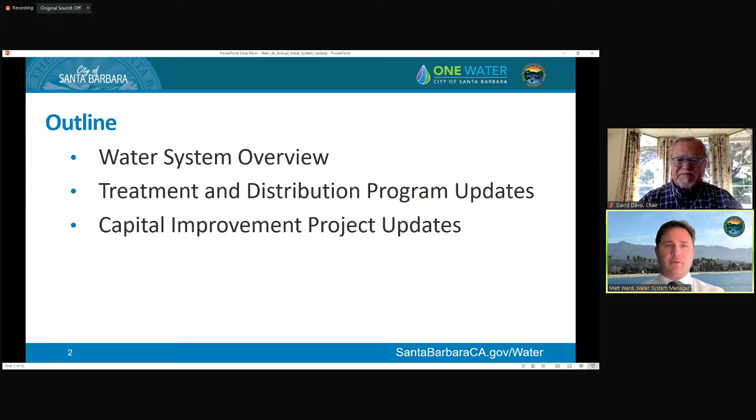It's important to mention that we have a diverse supply of water sources, which shapes our water system. In fact, we are a T5, D5 water system, the highest rated in the state. You're familiar with our different sources: state water, Santa Ynez water, groundwater, desalination, and recycled water, which we'll touch on briefly, but today we'll really focus on our potable water system.

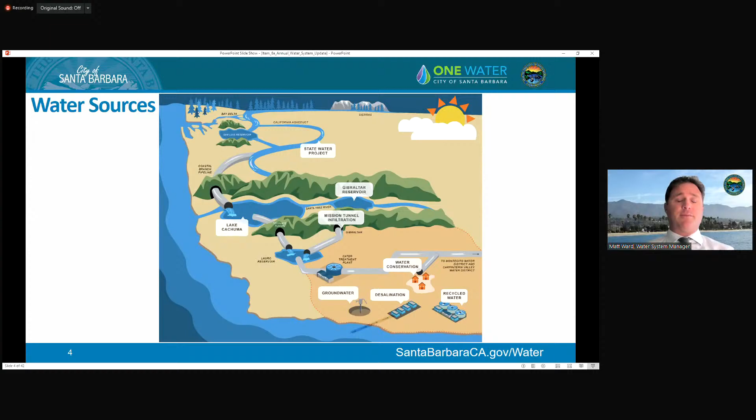What you see here is the 10,000 foot elevation of the city's water system. It's comprised of 3 potable water treatment facilities connected through 300 miles of potable water transmission mains and water mains, along with 13 reservoirs, 14 pump stations, and over 27,000 service connections. With that, I'll turn it over to Andrew Rhodes, our water treatment superintendent.

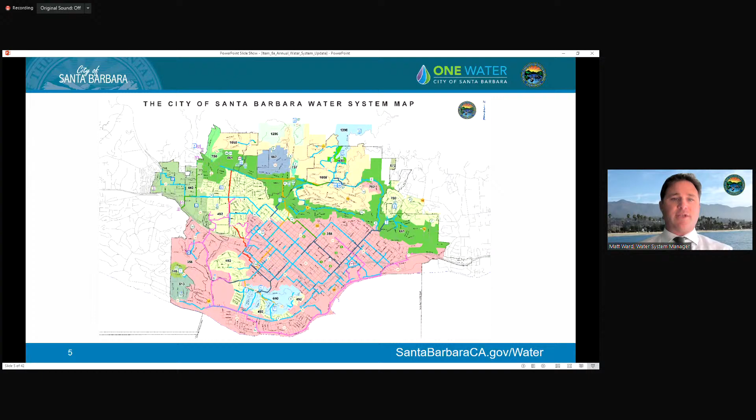Good morning, Chair Davis, Water Commission. My name is Andrew Rhodes, Water Treatment Superintendent, and I'll be providing a brief update on some of the programs under the water treatment section for fiscal year 21.

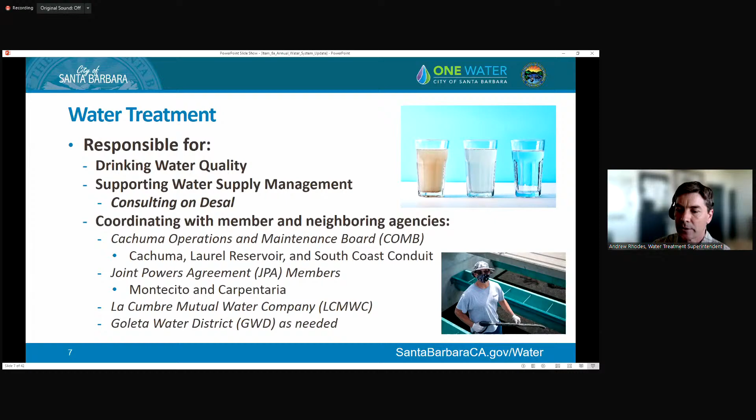We also coordinate with La Cumbre Mutual Water Company and Goleta Water District regarding water quality, supply, and project planning. The picture on the bottom right shows Winter Martinez performing biannual filter maintenance and inspection of filter media for life cycle analysis.

Ortega Groundwater Treatment Plant supplements surface supplies during times of drought or emergency. There are 4 downtown wells, Veracruz, City Hall, Corporation Yard, and High School that currently supply the plant. We have an upcoming project to connect a 5th well, Alameda Park, to the facility for treatment prior to delivery

into the distribution system. We are also responsible for the operation and maintenance of the hydroelectric plant, where when there's water in Gibraltar, diversions are conveyed through Mission Tunnel to the hydroelectric plant located on the north side of Laurel Reservoir. Electricity produced from the facility can completely offset all of Cater's electrical demands on a good year, which I would define as a year when Gibraltar spills.

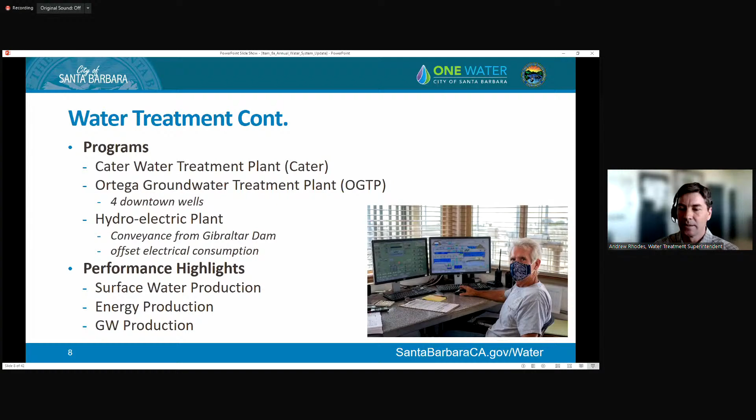So as mentioned before, Montecito and Carpinteria Valley Water Districts participate in both operational and capital project costs for Cater, which are defined by a joint powers agreement that was established in 1978 and followed by expanding Cater's capacity by adding 5 additional filters and constructing the South Coast Conduit Booster Pump Station to convey the treated water.

Our JPA members cover roughly 40% of the operation and maintenance budget, as well as the capital budget for projects at Cater. This slide shows a 10-year chart highlighting the percent of Cater's annual overall production that supplied Santa Barbara customers in blue versus Montecito and Carpinteria in green.

You can clearly see on the chart when water conservation measures took effect with the last drought, with a greater than 25% reduction in total plant production, and the slight rebound that we experienced starting in fiscal year 18.

This chart is somewhat skewed in that the past 3 years or so, the desal plant has consistently contributed water to help meet the city's demand, which would have otherwise been supplied by Cater. And so those blue bars, at least for 18 through 20, would be slightly higher without desal.

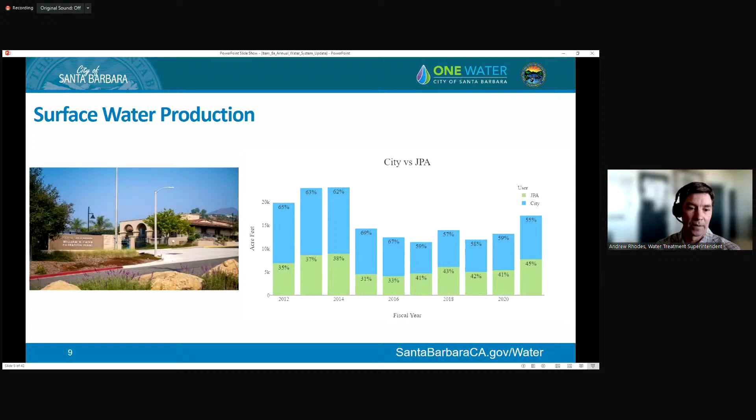Last winter was significantly below average for rainfall, and Gibraltar did not see any runoff. So by January 2021, it was empty. This winter has been better so far. It's filled to just over 50% capacity. So hopefully a few more storms will come and we'll fill it completely.

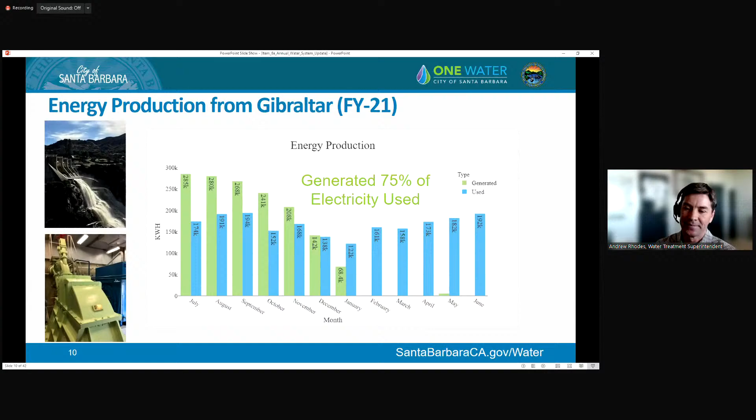There was no groundwater production in FY21. We have been resting our groundwater basins for the past several years, allowing for continued recovery after heavy pumping during the last drought. We took advantage of this resting period to clean and rehabilitate Corporation Yard Well in 2020.

The current plan is to start up Ortega groundwater treatment plant this coming August to help supplement supply. This is subject to change depending on how much additional rain we receive this winter and how much recovery our surface water supplies experience. I would expect, however, that if Lake Cachuma doesn't see significant inflow and rise in storage, that we'll be starting up the plant this coming summer.

And so with that, I'd like to open it up for any questions before turning it over to the next presenter. Any questions from any of the commission at this point?

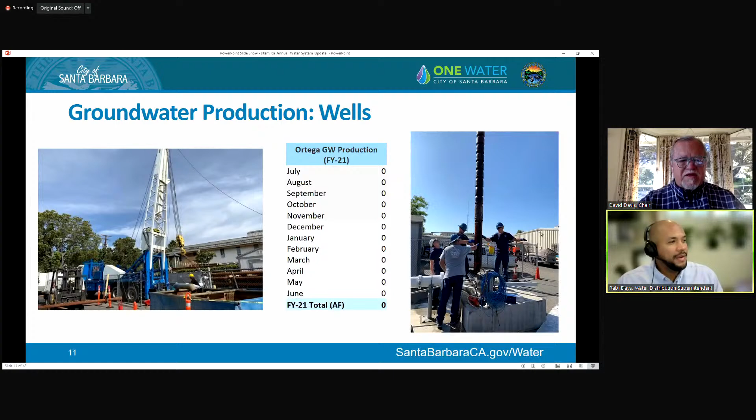Thank you, Andrew. Good morning, commissioners. My name is Rabi Days, I'm the recently appointed Water Distribution Superintendent. Today I'll be giving you an overview of the Water Distribution Work Group, as well as some of our recent performance highlights.

Water Distribution is a fairly large group with 34 full-time staff members supported by 3 supervisors with their own work groups. Here we have a list of some of our general responsibilities, our most obvious responsibility being the maintenance and repair of the potable and recycled water distribution systems.

We've also been responsible for the metering program and customer service, but our recent reorg has now transferred the metering program to the Water Services Work Group while maintaining a shared responsibility for customer service. We oversee the storage and quality control of our water supply once it leaves Cater treatment plant.

Lastly, for this slide, I believe an understated but important part of what we do is our level of coordination with other agencies and work groups, public and private. Here we have listed some of the groups we work with, from the City Public Works Permits Counter to the Land Development Team, especially with the uptick in increased density development the city has seen in recent years. Our staff helps scope and process water-related construction permits, but also actually builds the underground infrastructure to support these projects.

We also coordinate with a lot of other city work groups on asset conflict and considerations for city capital projects. We work with transportation, streets, wastewater, parks, water engineering for our own capital projects, and even creeks. Our most recent project being the Arroyo Burro pedestrian bridge, a creeks improvement initiative that involved relocating our water main that was previously running across the creek, incorporating that relocation into the design of the new pedestrian bridge. This coordination gave us the opportunity to raise our water main above the 100-year flood line while adding protection in the form of the bridge structure itself.

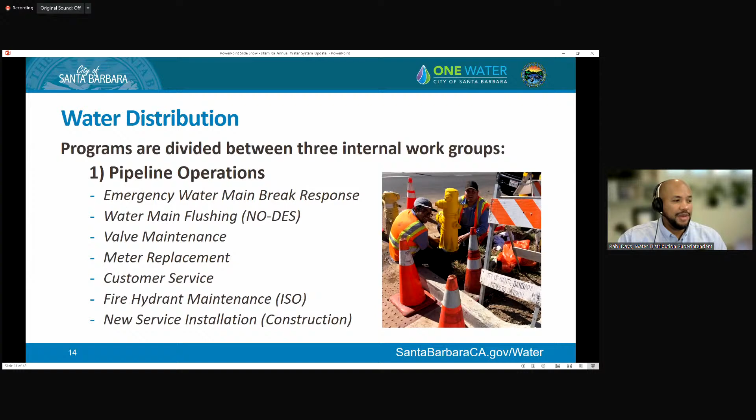This crew is also responsible for valve maintenance, meter replacement, customer service, fire hydrant maintenance as pictured in the photo, and new service installations.

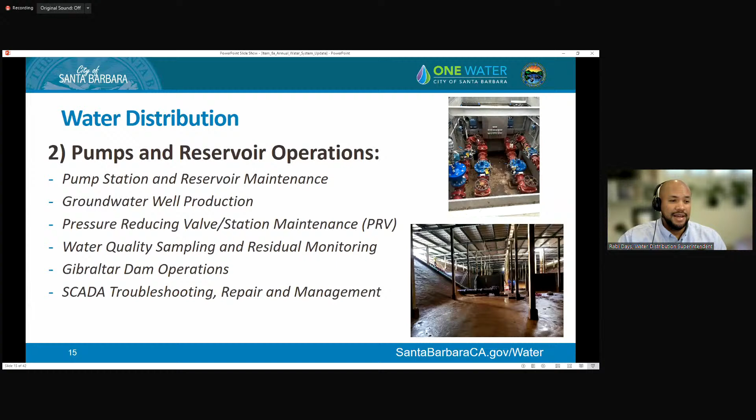There are also 2 subgroups that branch off from this group, one being the full-time on-site Gibraltar Dam caretaker and the operator that assists him with maintenance of our dam facilities, and the CSOS or Control Systems Operator Group that maintains, troubleshoots, and manages our SCADA system, allowing us to remotely monitor and control certain aspects of the water system.

This group manages our asset management software, specifically our planner scheduler, who works closely with staff to document our work and oversee the preventative maintenance methods. Our coordinators are under this group as well, handling our utility coordination and plan review. Also our cross-connection team looking out for the safety of our drinking water and enforcing standards and regulations for the distribution group as a whole.

Recycled water user agreements and customer interactions are also facilitated with this group. So this group really has a broad range of skills and duties. But I think the program that I'm most excited about with this group is our developing GPS program. A couple of years ago, we started collecting high precision GPS data for our assets.

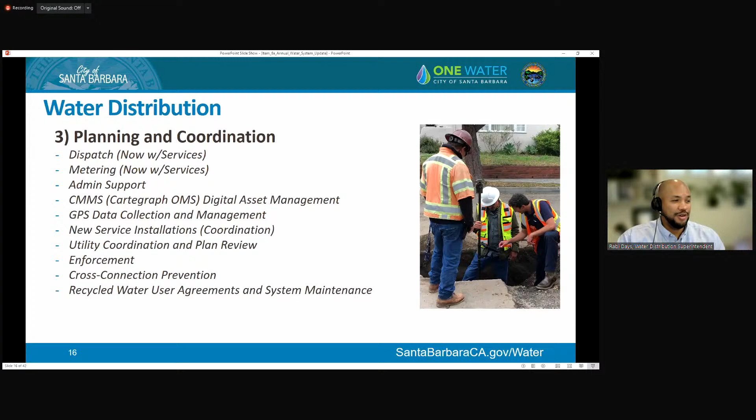But for this year's performance highlights, we've got 4 programs that I'll be discussing: our emergency water main repair, our valve maintenance, our customer service, and our fire hydrant inspection and maintenance program.

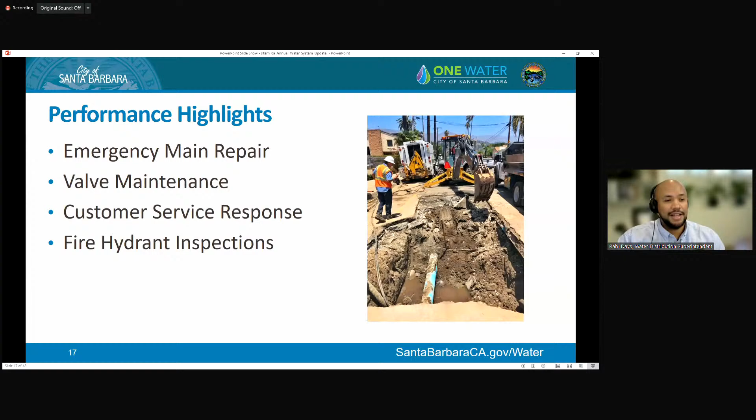In this slide, we have a photo of a water main repair. On the backhoe, we have Alfonso Lopez, one of our more experienced technicians.

Compared to all the types of work that we do, water main repair is definitely the most visible and impactful for the community in various ways. It's messy. We usually have to reroute traffic. It's loud, and the water service is often disrupted. Our response in this area can greatly affect the public perception of our entire work group and the city as a whole.

Some main breaks can be addressed without shutting down the water main, with our only community impact being traffic rerouting and construction noise. But other mains can be difficult to access for reasons such as being encased in a bridge or freeway crossing or on a remote easement that would require a non-standard repair.

Others may require a shutdown of water service to that block, or in some cases, multiple city blocks. And when we've determined that a shutdown is needed, we also have to look at who it affects. We have medical facilities, schools, restaurants that are all significantly impacted by a disruption in water service. So we weigh those community needs against the severity of potential risk for damage or loss. And that's really going to be a different scenario for every main break that we come across.

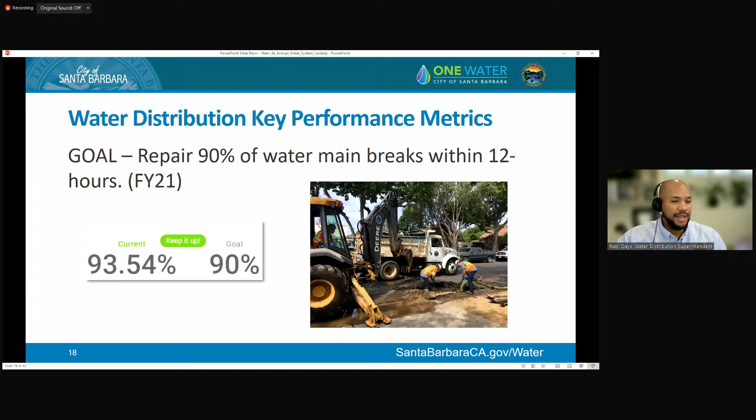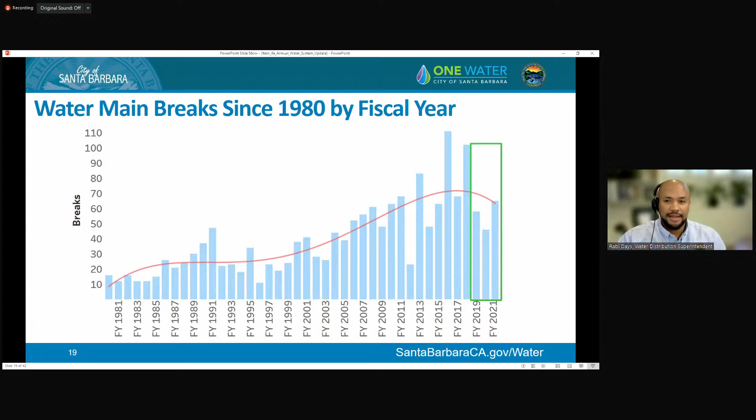One of the efforts adopted to combat this problem was the increase to our main replacement mileage to 2% after FY18. As you can see, FY19 through FY21, the increased scope appears to have contributed to a downward trend in our main break numbers. We're seeing the same trend this year, with our current tally being at 35 main breaks for fiscal year 22. But refinement of our approach is an ongoing task, and we aim to drive that number down as much as we possibly can.

So next slide, please.

The next performance metric that I'll be discussing is our valve maintenance target of exercising 4,500 valves every year, which is roughly half of our system isolation valves. Our valve maintenance program involves targeting the valves in our system on a preventative maintenance schedule and operating them to either confirm or restore functionality and flag any valves that are not functioning properly and need to be replaced.

This is important because our isolation valves are the sole mechanism used for shutting down water mains during emergencies. So faulty valves equals a prolonged inability to shut off water, which in turn equals increased potential for damage, increased water loss, and an increase to the number of customers affected by emergency-related outages.

But bad valves can also negatively affect planned work. It often increases the scope and notification needs for planned projects, often extending construction schedules, which can have budgetary consequences and lead to bad community relations.

And valves that are completely broken, closed, and unaddressed may not be a visible threat, but can create water quality issues in the form of unintended dead ends and not allowing for the grid circulation that our system is designed to do. As you can see in the graph, we were close to reaching our target this past fiscal year, but have struggled in past years.

This is an AWWA recommended maintenance practice, so we did make some adjustments to help get us closer to our target. And we're continuing to improve our strategy.

Some of the adjustments that we've made are adding additional staff so that we have more resources to spread across the entirety of our annual objectives. We also purchased an additional vehicle with a valve actuator so that we could deploy 2 crews at a time in case one was tied up with capital project support.

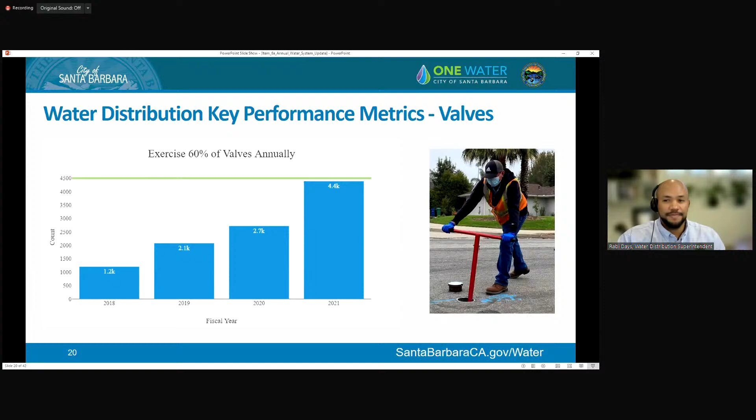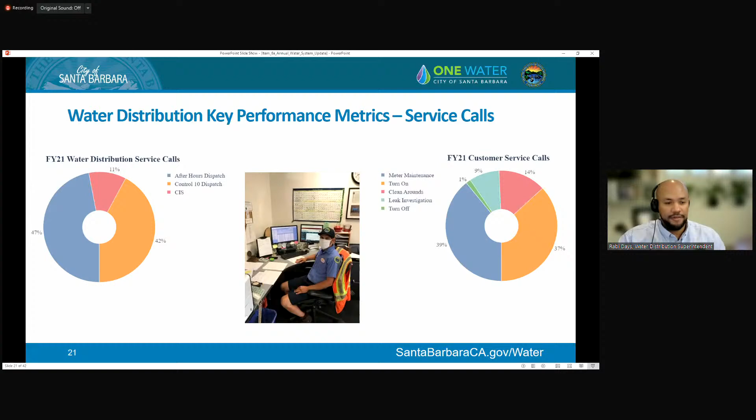I think across all of our programs, the pandemic has really put our community impact into perspective for all of us. Next slide, please.

That does it for water distribution, so I'll open it up for questions before passing along. Any thoughts or concerns?

Thank you for the presentation. Are there any questions or comments from commission members at this point?

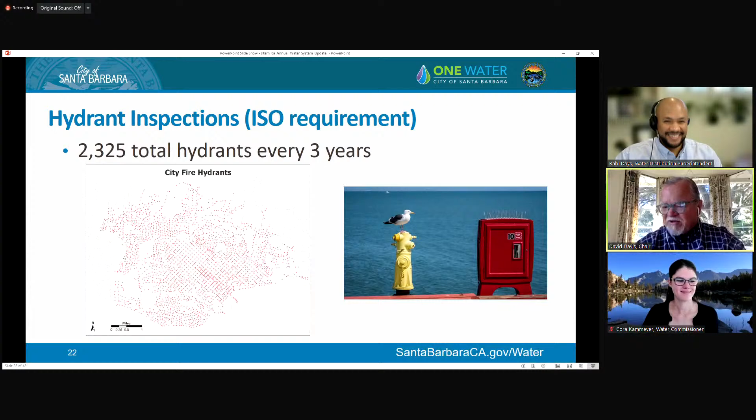A lot of work, just a compliment on the amount of work you guys do. Again, on all these divisions, it's 24/7, 365. It's amazing because you're out of sight, out of mind for most people, but incredible work that you folks do. So thank you for that.

Appreciate it. Okay, want to continue with the presentation, or where are we at right now? Yeah, thank you for your time, commissioners. I'll be passing along to Principal Engineer Philip Maldonado. Great, next slide please.

Perfect, thank you very much, Mr. Days. Good morning, commission members. My name is Philip Maldonado. I am the interim principal engineer with our Water Resources Engineering Group, and I'm here to provide updates on the capital projects being implemented for the water system. I will review these projects by the different project areas within the water system.

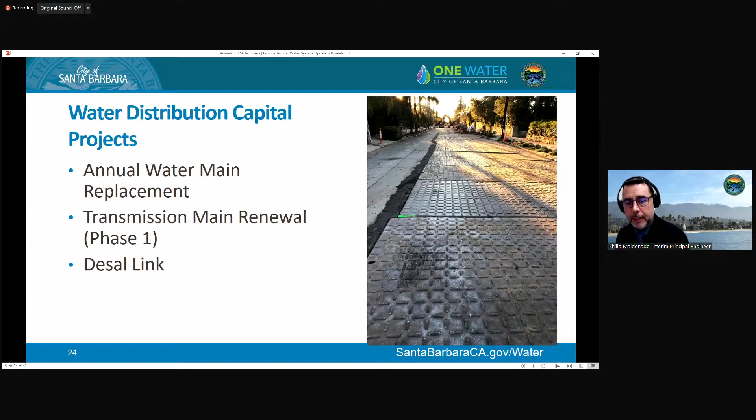We have worked to prioritize replacement based on factors which include, but are not limited to, material type, break history, size, installation date, and location. We have also remained adaptable to changing priorities. A primary example is the reduction of this project in fiscal year 2020 due to the COVID emergency.

The current project in construction began this past November, with the second phase scheduled to begin construction this coming summer. The next fiscal year project is actually scheduled to begin winter of 2022-2023.

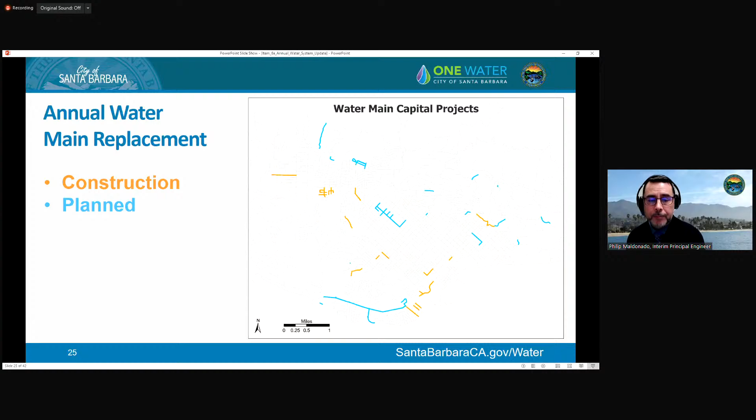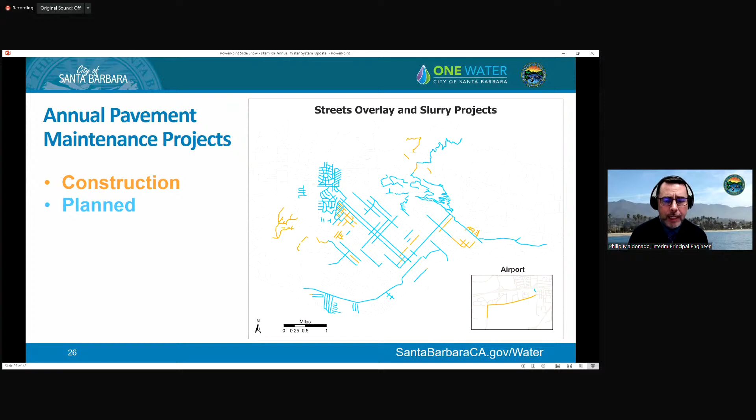The diagram on this slide depicts the planned pavement maintenance for the next few years. Coordinating with our streets division is a key objective to the water main process improvements that have recently been implemented. The extent of both the water main replacement and pavement maintenance projects highlights the need to stay coordinated for effective project implementation and to minimize disruptions for the public.

I would like to take a moment to share the effort that we undertook to improve and document our water main replacement process. We realized there would be serious process impacts induced by doubling the size of the water main replacement project. We set a goal to implement this change while minimizing cost impacts and improving delivery schedules, while also modernizing planning.

For accuracy and efficiency, we focused on mapping and defining the process, improving coordination between all stakeholders, clarifying roles and responsibilities, improving the transfer of information, and ultimately building a culture defined by one water, one city. The diagram on this slide is the basic outline of the process workflow our team designed. Each of these areas was identified as integral to realizing the goals we have set.

We use a cycle to reinforce the need for communicating feedback and refreshing data streams. Mapping this process helped to identify multiple updates. These include using a multi-year contract for design services, adding pre-design team site walks, improving asset management and geodatabase workflows, defining roles and responsibilities, and outlining pathways for communication and coordination, just to name a few.

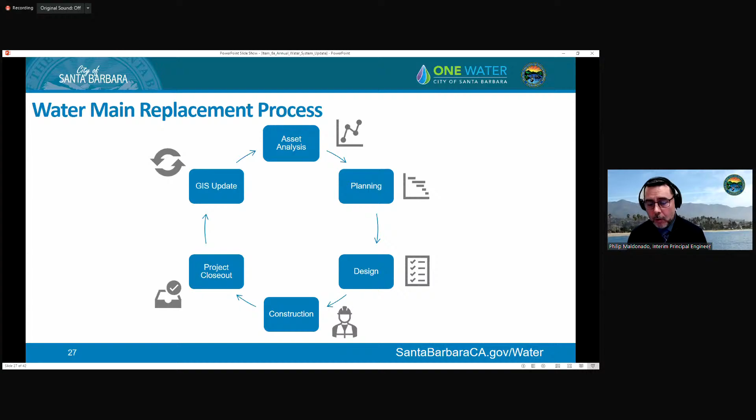We have already started to see implementation benefits. These include improved resource allocation with sequenced capital improvement work between the groups, fewer disruptions to neighborhoods, reduced pavement disruptions, and more areas for cost sharing.

The next project I'd like to discuss is the transmission main renewal. As depicted on this slide, phase 1 of the transmission main renewal will focus on rehabilitating the existing distribution transmission main between the intersection of Mission and Garden Streets and the Cater Water Treatment Plant. The transmission main pipeline was assessed to be in good condition, allowing us to gain the benefit of using existing infrastructure for much of the distance between the desalination plant and Cater.

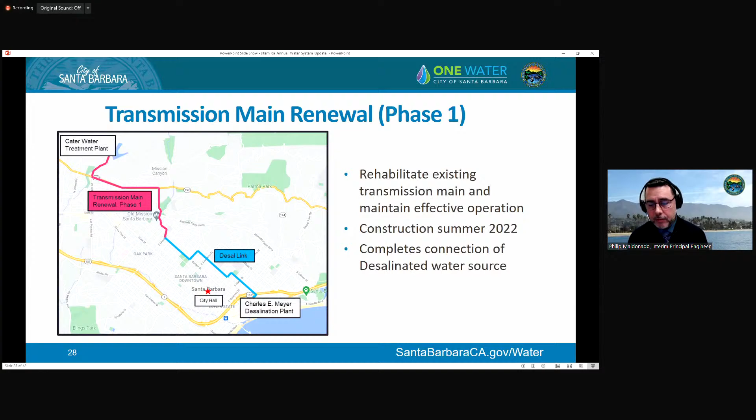Rather than replacing this length of pipeline, we are ensuring a high-quality transmission system by strengthening the existing segment and connecting it to the new desal link. The work for this project will replace valves and associated operational equipment along the length of the main, in effect renewing the system. Construction is currently scheduled for later this summer.

Construction began this past November, starting at the intersections of Mission and Garden Streets. Installation work continues to progress south to the desalination plant. Work has experienced some initial challenges due to large boulders and unforeseen conditions.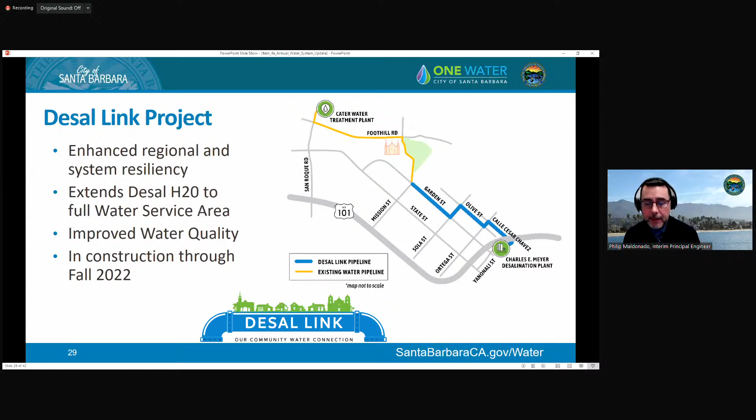But as with all of our capital projects, we are working diligently to ensure our existing infrastructure is restored and maintained as this new pipeline is installed, to guarantee all of our assets support ongoing public benefit for years to come. Work continues to move south, and we anticipate the pace of installation to continue on a reasonable schedule.

This brings us to the recycled water capital projects. The project focus here is the recycled water distribution pump upgrades. This pump station is the heart of the recycled system. It was constructed in the early 1990s and supplies all of the water for the recycled system. The goal of this project is to replace the mechanical and electrical equipment in the pump station.

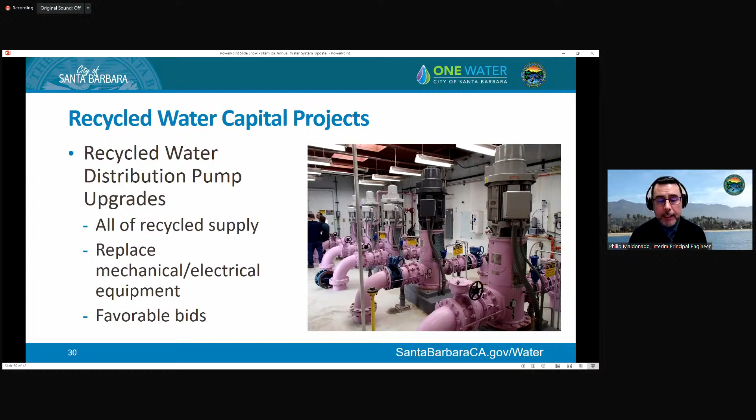The city received favorable bids to construct this work, and the project is currently in construction and is scheduled to be complete summer of this year.

We will now review the water treatment capital projects. Our focus is on the Cater Finished Water Reservoir Resiliency Project. The goal of this project is to add a chlorine contact time reservoir to the Cater Water Treatment Plant.

The design includes a structural analysis of the existing clear well. The design will also include reconfigured inlet and outlet piping to the clear well.

Design for this project began in June of 2021, and the project has established a conceptual design, and this concept design is being analyzed for environmental review and water flow and treatment characteristics. The concept will be defined in the preliminary design report that will be delivered this winter. Design is scheduled to continue through winter of 2023, and the total estimated project cost is anticipated to approach approximately $20 million. Next slide, please.

We will now review the reservoir capital projects. Our focus for the reservoirs is the Vic Trace Reservoir Replacement Project. The Vic Trace is the city's largest distribution reservoir. It is a critical storage buffer for operational needs.

It is worth mentioning that the start of this project must be coordinated with the completion of the Cater Finished Water Reservoir project. The full storage capacity of Cater must be available when this storage is removed for construction.

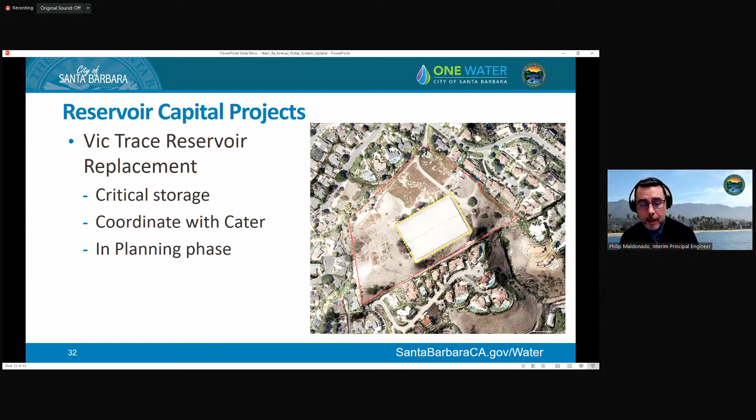The design contract is scheduled for next fiscal year. This project was identified through the water distribution infrastructure planning effort, and the total estimated project cost at this point is just over $40 million. Next slide, please.

Finally, we'll discuss desalination-related capital projects. For desal, we focus on the product water pump station upgrades. The product water pump station upgrades are needed to help move water up to the Cater water treatment plant from our desalination plant. Water can be distributed to all portions of our system once water is moved to Cater.

The project is nearing 100% design and is scheduled to begin construction in summer of this year. And with that, that concludes my portion of the presentation. So I leave it open to any questions if there are.

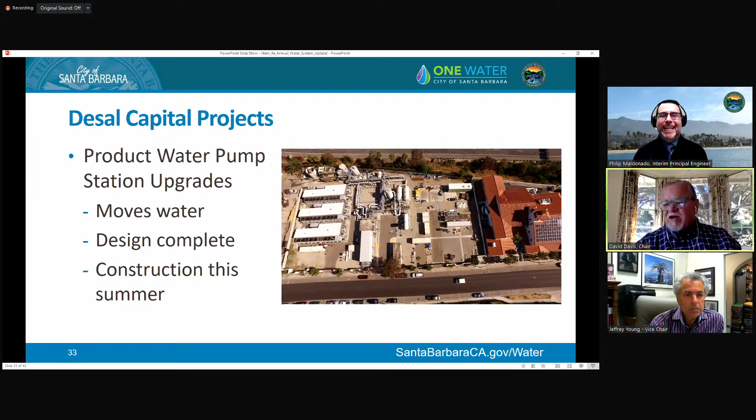Okay, I'm going to look for any questions. I actually have a question relative to process for Mr. Haggmark and Ms. Becerra. We've moved over from GoToMeeting to Zoom, and I've been looking for people to raise their hand. I noticed that Commissioner Kemmerer had a question in the previous section, and she turned her camera on, but I wasn't looking for that. I was looking for the Zoom raise hand or something else. So we'll come back to talk about what our procedure is. Right now, I'm going to be looking for raised hands. If you go down to your taskbar at the bottom, there's a raise hand thing.

So is anyone who wishes to raise their hand on this item? And I'll actually come back to you, Cora, basically for your other question. Any questions? Go ahead, Jeff. Thank you. And so I'm just curious, the cost for the desal capital projects, I don't think I heard a number.

With the desal capital, the product water pump station upgrades project, right now our current estimate is around $3.5 million. And actually, Mr. Ward or Mr. Haggmark, please correct me if I'm misstating that. So, I mean, that's close enough. I'm just looking for kind of an estimate.

So I heard 40 million for one upgrade and 20 million for another. It's a lot of money to me, to my ears. I just want to hear from you guys how this is expected, it's anticipated, it's all within our budgeting, and there's no red alerts here.

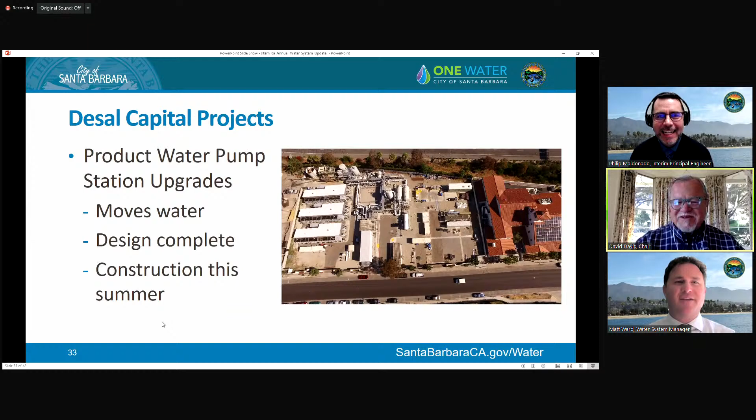Okay, other questions at this point for Mr. Maldonado? Philip, I guess I don't see any. Thank you. Thank you, Chair Davis. At this point, I'll turn it back over to Mr. Ward to close out the presentation. Thank you.

Thank you, Mr. Maldonado. So we just wanted to touch briefly on some of our other water system program highlights. We do have some developing programs, and wanted to get this in front of the commission, and in future years we'll be adding to this presentation, or perhaps have an entirely separate presentation on our water service, our customer service group. This is a new work group formed of existing employees in areas that focus a lot on customer service, as well as some new leadership in the customer service work group. They're currently very focused on AMI, which I'm going to touch on briefly, and we also wanted to connect on our desal contract operations briefly.

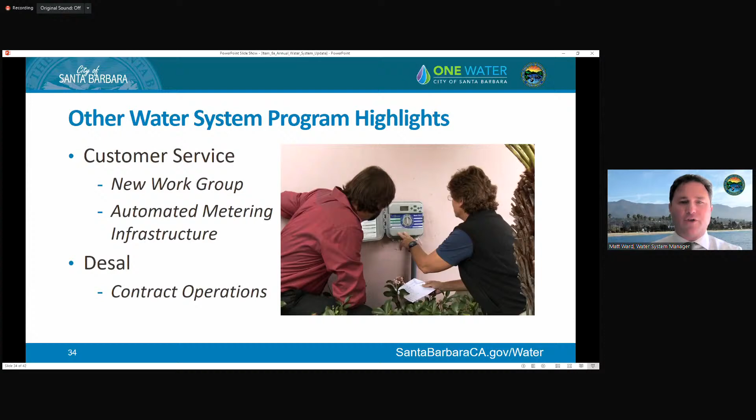Next slide. So we presented this over a year ago, and this just shows that we were looking at moving some programs around in water resources to focus more primarily on customer service. The strategic move moved certain programs from water and wastewater under the water supply and services manager, with the main focus again being on customer service and the changes going on within our metering infrastructure.

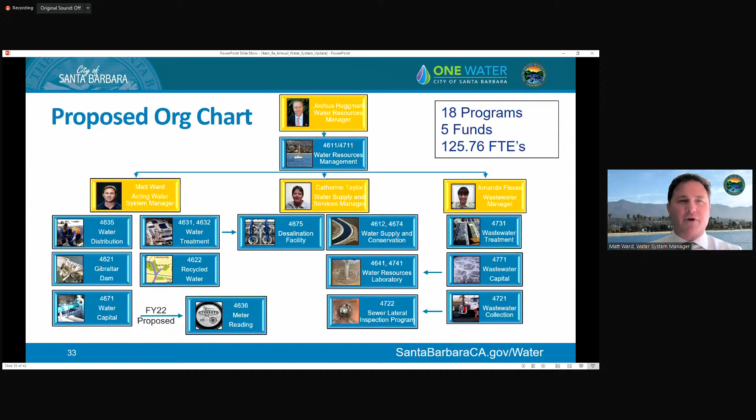Next slide. A brief update on our water service and customer service program: we did hire a new water service superintendent, Teresa Lancy, who you know, and she is bringing strong leadership to that group. We also hired a new water service supervisor role, which we filled in November. That team is currently really focused on AMI, but they're also looking at all things customer service related, both for our customers, but also internally, and how Water Resources works as a customer service organization.

Some of the AMI implementation focus is currently on customer communication, outreach, noticing, billing, and how the AMI system is going to function in this new environment. We're also looking at our internal operational needs and how we're going to be able to use AMI data to create a more analytical organization and use that information for shaping our programs at large.

The AMI project, I'm happy to report, is on schedule and it is currently in the alpha phase. The alpha phase includes setting up software and doing mostly a proof of concept, and that is scheduled to continue until May.

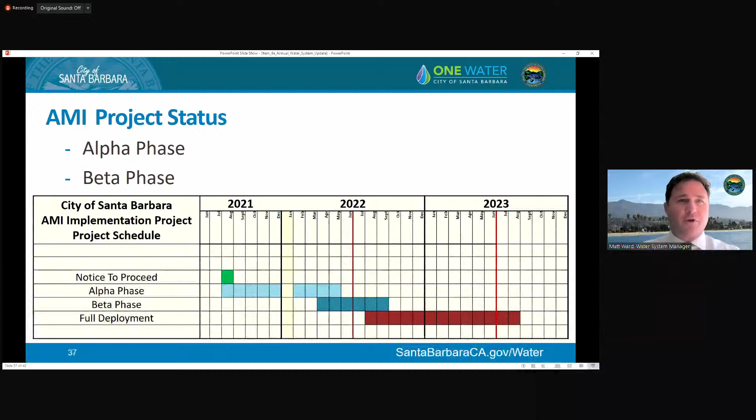This summer, we're going to begin our beta phase. Our beta phase is going to include a test population of our meters, about 2,500 radio endpoints on our meters that we're going to begin testing our software with. Once that is complete, we're going to look to deploy the rest of the remaining radio endpoints late this summer. We'll be operating that system for over a year as we test it and make sure it's ready for public consumption and that all the software communicating and integration is done and complete.

Last, we just wanted to connect in our desal operations. It's a key supply for the city. It's something that we're integrating into the rest of our system and into our treatment facility hub at Cater. That contract is going to be expiring in September 2024. We're going to be evaluating future operations.

And with that, that brings me to final questions.

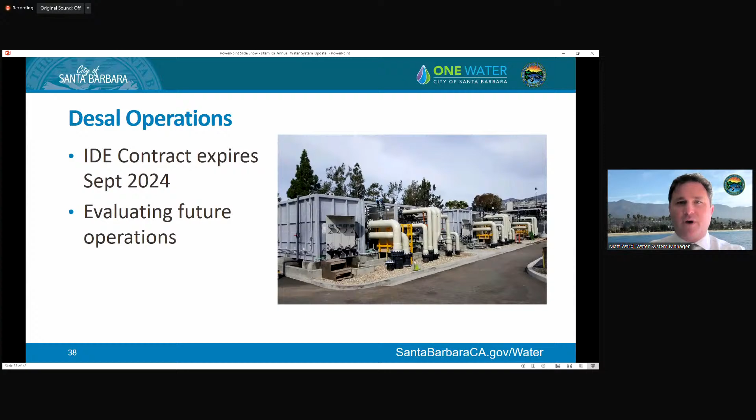I just really want to comment that I love this presentation because it's so comprehensive with all the inner workings and the customer service. I had a water main break on my block last week, and staff gave incredible customer service in restoring that and communicating with the neighbors, and the liaison for COMB and for CCRB. I'm so proud of how the city is represented on those regional boards, and what leaders we are in that, and the work on the desal line providing that for the whole city and community. It's a real pleasure watching this presentation and seeing the details of how much work and coordination goes into us turning our taps on and getting that water. So well done, and thank you.

Hear, hear. Commissioner Young? I was just going to say I appreciate the presentation also. When you really get to see the quantity of the components that are involved, whether it's the miles of pipe, or the valves that have to be turned, or the fire hydrants, it really is quite impressive. I appreciate seeing staff really on top of all of these components, because it's really critical to making sure Santa Barbara gets water. We take it for granted when we turn on the tap or flush the toilet, but there's a lot that goes into that to make sure it happens without any problems.

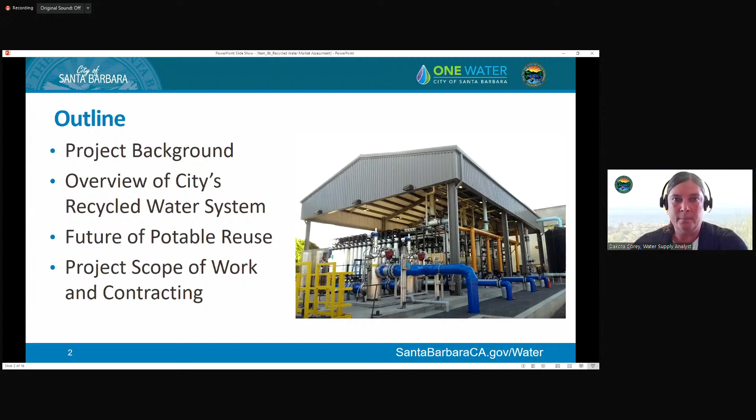Background on the Recycled Water Market Assessment Project: as mentioned, it's a direct policy recommendation from our 2020 Enhanced Urban Water Management Plan. That recommendation was to update the 2009 Recycled Water Expansion Assessment, a project undertaken by city staff and consulting firms in 2009 to look at expanding the recycled water system and connecting as many customers as possible. In this new project, we'll perform a similar cost-benefit analysis to identify opportunities for increased recycled water consumption within our existing system.

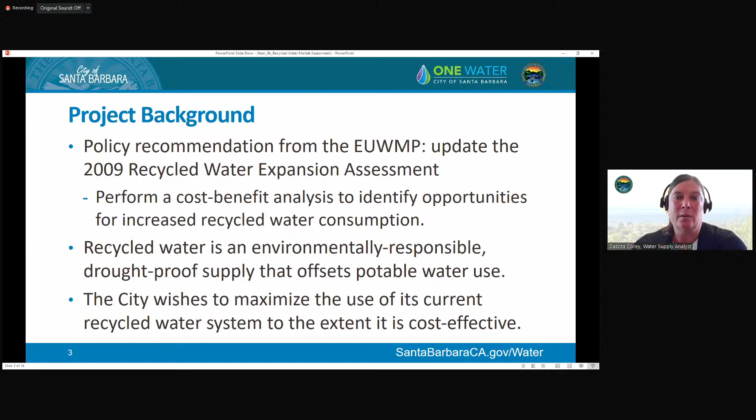Recycled water is an environmentally responsible, drought-proof supply that offsets potable water use, so it makes an important contribution to our overall water supply portfolio. The city wishes to maximize the use of its current recycled water system to the extent that it's cost-effective. That's really the background for why we're moving forward with this project.

A brief history on recycled water within the city: we began planning for recycled water in the early 1980s, and phase 1 of the project was completed in 1989, including tertiary treatment with carbon filtration and disinfection, a distribution reservoir, a pump station, and 5.1 miles of distribution main. Phase 2 was completed in 1992 and added an additional pump station and reservoir, plus 8.3 miles of additional recycled water distribution main.

In 2009, that water supply planning study I mentioned earlier looked at market assessment and analysis of potential pipeline expansion to add new customers to the system. Then in 2015, we made upgrades to the tertiary treatment plant to include microfiltration and ultraviolet to make sure we were meeting water quality treatment requirements for tertiary treated recycled water.

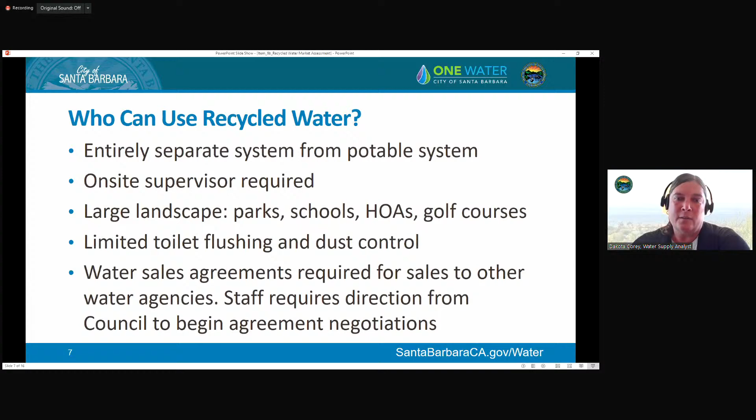Recycled water customers pay for the O&M costs, or operations and maintenance costs, related to the recycled water program, and a portion of the capital costs for annual system renewal and replacement needs. What that means is potable water customers fund major improvements to the water system as a whole, both recycled and potable, because recycled water provides a reduction in potable water demands, so it provides a benefit to the potable water system.

Recycled water is one of our more expensive supplies. It costs about $1,400 per acre foot. In comparison, water from Lake Cachuma is about $1,000 per acre foot. Groundwater ranges from about $500 to $900 per acre foot, depending on the level of treatment.

Current recycled water customers pay $4.53 per HCF of water used, as compared to our potable irrigation customers for recreation, who pay $5.22 for tier 1 usage, and then $25.41 for tier 2 usage. Our commercial potable irrigation customers pay $13.77 per HCF for tier 1 usage, and $25.89 for tier 2 usage.

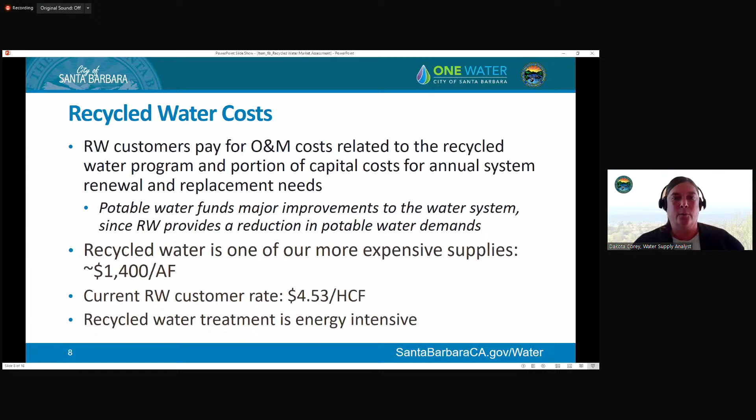So how much recycled water do we have available in the city? A design capacity of the El Estero Water Resources Center is for 11 million gallons per day. The average daily flow into the El Estero Water Resources Center is 6 million gallons per day. And then of that, from the recycled water system, our peak production capacity is 2.5 million gallons per day, or about 3,000 acre feet per year.

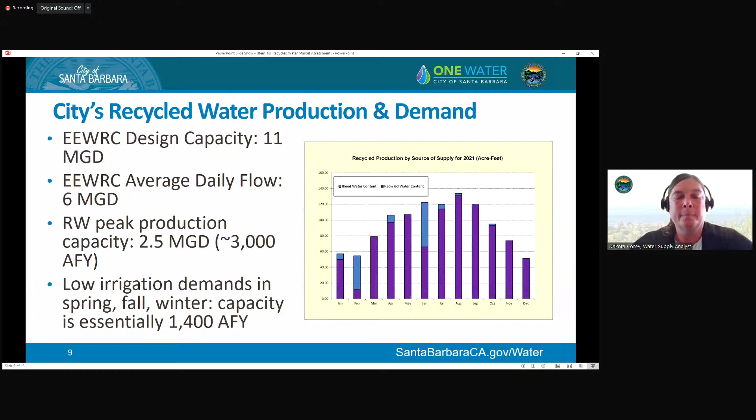So then let's look more specifically about recycled water production and demand. Our current demand on the system is about 1,000 acre feet per year, which includes about 230 acre feet of water that's used for processing in El Estero. That represents about 9% of the city's total water demand.

Since the 2009 market assessment, we have connected additional customers for a total usage of about another 100 acre feet per year. And then, as you know, we also recently signed our recycled water sales agreement with La Cumbre Mutual Water Company, and they are able to take 40 to 100 acre feet per year under that agreement.

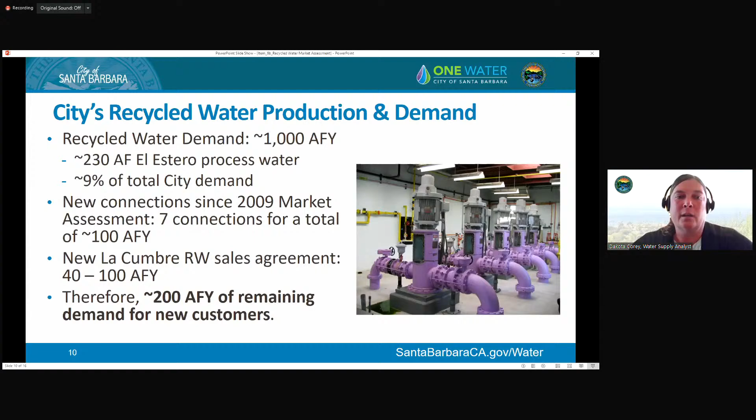So with some basic back of the envelope math here, it shows that we have about 200 acre feet per year of remaining demand for new customers. So when we're kicking off this recycled water market assessment, we're going to better refine those numbers, but that shows you kind of the possibilities for new connections and new supply within our existing system. That's really what we're targeting when we're looking at this recycled water market assessment. Next slide, please.

I do want to take a minute to talk about potable reuse because that is in our future. The city conducted the 2017 potable reuse feasibility study to look at the future potential for potable reuse within the city. And through that study, it was determined that raw water augmentation at Lauro Reservoir was the most feasible option for potable reuse at the city.

What that means is there would be an advanced treatment facility located down near El Estero, and then that water would be pumped up to Lauro Reservoir, where it would blend with our other supplies that flow into Lauro, like Cachuma and Gibraltar supplies, before it's treated once again at Cater Water Treatment Plant and distributed to our customers. What that means is that a portion of the recycled water distribution system, which is separate from the current potable system, would be repurposed to move that advanced treated water from El Estero up to Lauro Reservoir.

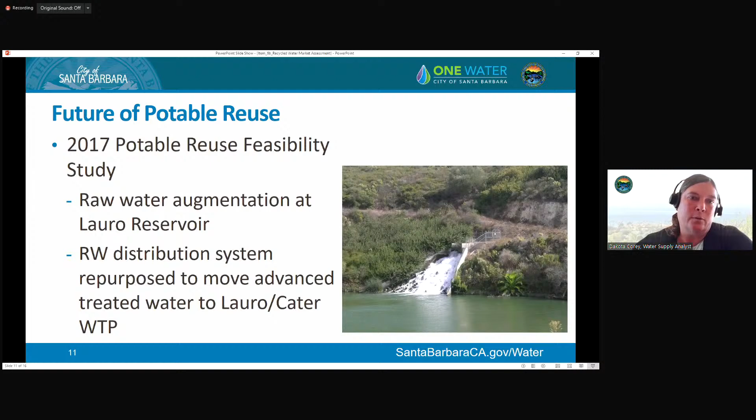And so that would essentially make our current recycled water system obsolete, since those pipes would be used for a new purpose and those customers would be served potable water, although we'd have a new source of potable water, which would be potable reuse. Next slide.

So the potential for potable reuse within the city, we dove a little bit deeper on this in our 2020 Enhanced Urban Water Management Plan, and potable reuse was shown to be the second best performing new supply for the city after desal expansion. We looked at two different scenarios for potable reuse in the plan: one considered 2,900 acre feet per year, and another scenario considered 6,000 acre feet per year of potable reuse production.

There's additional evaluation needed regarding the feasibility of potable reuse for the city, or maybe not the feasibility, but to actually implement it. We need a lot more information on costs, and a lot of that is also tied to the regulatory environment. Final regulations for potable reuse and raw water augmentation have not been promulgated for California yet. Once we fully understand what the regulatory requirements are, we can come up with better costs and better refine the project and understand how feasible potable reuse would be for the city.

But what that means is the timeline for additional potable reuse regulations is probably 15 to 20 years. And so that really provides an umbrella over this project I'm talking to you about, the recycled water market assessment, because it cuts the timeline for the benefits to those new customers to 15 to 20 years, when typically a capital project might have a longer lifespan. So that's really where the context comes in for this particular project, and we'll explore that further as we work on this project.

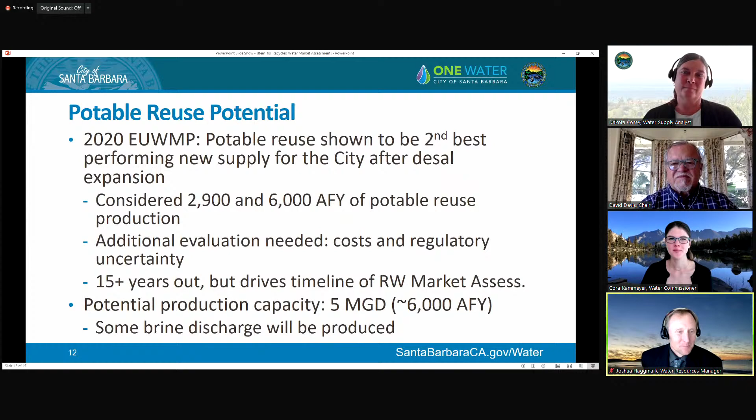Yeah, I hope that helps. It's a good question, a great question, and I really appreciate it. I'm hoping we can do a good job answering that concisely in the study. Any other questions? Any other hands raised at this point? Okay, Ms. Corey, you can continue.

Thanks, okay let's move to the next slide. So now let's look a little more specifically at the scope of work associated with this project. That was a nice transition, Commissioner Kammeyer, thank you. There are a few main tasks within this project.

The first is to evaluate the city's current non-potable recycled water demand and system. That's really redefining these numbers I went through broadly earlier in the presentation about how much extra demand or production capacity we have available to serve new customers.

From there, the consultant will look at a new recycled water demand analysis. That means looking at our existing potable customers, their demand and spatial location, and determining which customers might make good new customers. This will include both an analysis of current potable customer demand, as well as a spatial analysis using GIS to cluster those customers in a way that would make cost-effective projects in terms of connection to the recycled water system.

From there, we start looking at the cost-effective analysis. We'll have a cost per acre foot for connecting these new customers identified in the second step. The basis of cost effectiveness will be whether it's less expensive than our current cost for state water project water or desalinated water, our two most expensive supply sources. If so, we would determine those new customer connections to be cost effective.

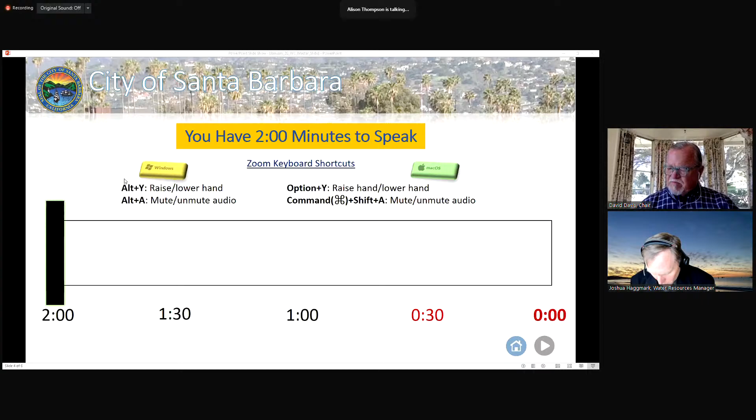I just wanted to take a brief moment of your time to thank staff, Ms. Corey and Mr. Haggmark, for putting together this presentation and for evaluating the need of recycled water and updating this study for our community. Heal the Ocean is very excited to see what results from this study, and we appreciate that you're looking into this and prioritizing recycled water for our community. Thank you all so much for the time and the presentation. We learned a lot, and it's great to continue seeing recycled water expand.

Great, thanks Ms. Thompson for your comment. Ms. Becerra, is there anyone else who wishes to speak? Not at this time. One moment, let me remove permissions to speak from Ms. Thompson, and back to you, Chair Davis. Great, thank you very much.

Good, thank you. Ms. Corey, thanks for the presentation. Again, very informative, and we'll look forward to seeing that study come back sometime in the summertime, I guess, for the presentation. So projected, we're pretty much right on schedule right now, so we will go to item 6C.

This is the wastewater rate study update. Mr. Haggmark, do you want to kick this off and introduce Ms. Hoffenberg? Yes, I would love to. Chair Davis, Water Commissioners, Joshua Haggmark, Water Resources Manager, excited today to bring forth the wastewater rates.

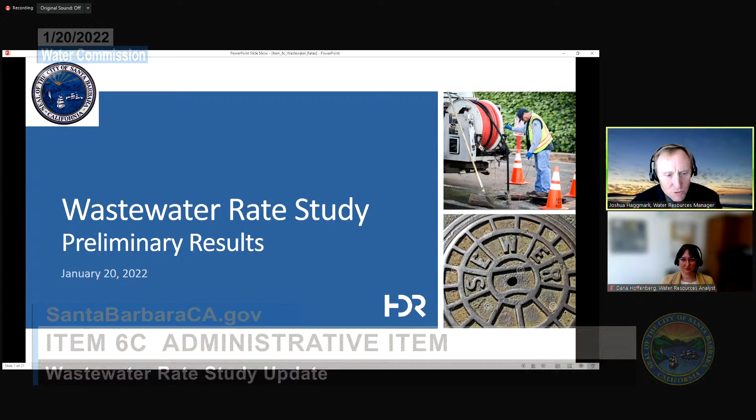We've been talking in October, we brought to you the capital program, we talked a lot about the operation and maintenance of the wastewater system. And today we're really getting into what are the revenues needed to support that. And as many of you know, Malcolm Hamilton has left the city, and Dana Hoffenberg, our water resources analyst for the city, has stepped forward and volunteered to actually lead the wastewater rate study.

So I want to bring her on. You've probably recognized Dana, she's presented on quite a few issues over the years, and she spends a lot of time interacting with our customers on rate issues. So she's got a vested interest in this process and leading this effort. So with that, please take it away, Ms. Hoffenberg.

Good morning, everyone. My name is Dana Hoffenberg, I'm a water resources analyst, and I'm going to be going over our wastewater rate study update with you. I'll be joined later on by Sean Korn with HDR Engineering, who is our expert rate consultant. Could go ahead and do the next slide, please.

So first off, I want to start with just some key themes. These are the things that are top of mind when we're looking at developing our rates and our financial planning. So of course, we have ensuring public safety and environmental protection through investment. Our Water Resource Center at El Estero is perhaps one of the most important pieces of infrastructure in the city when it comes to protecting public health and safety and the environment. So it's really key that we make sure we're investing in this piece of infrastructure. And we are really invested in the environmental protection that this piece of infrastructure provides.

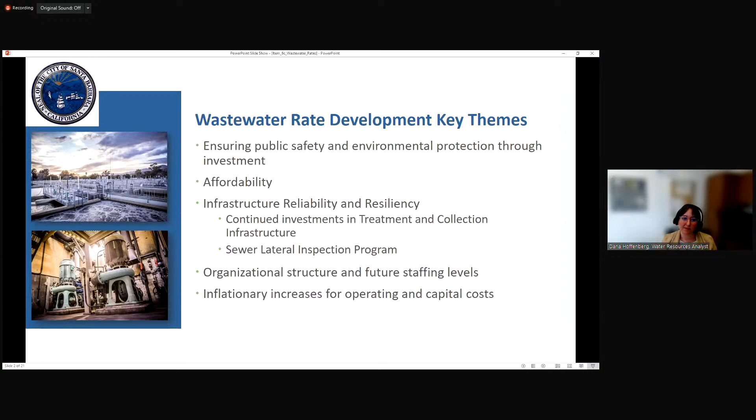So giving you a little bit of a retrospective of how we got here. This rate study is a continuation of the city's review and development of cost-based rates, and of our past financial planning practices. What we generally do is look at a 10-year planning horizon and create a 10-year financial plan, and then using that, we focus on between 3 to 5 years for a specific rate-making period. At this point, we've decided for this round of rate changes to go with just a 3-year planning horizon. With everything being a bit unstable right now with the pandemic, we've decided it's most prudent to go with a 3-year horizon for this round.

For our last rate study, we also did a 10-year financial plan, and in that plan we forecasted a 5% revenue increase requirement for these next 3 upcoming fiscal years. In this new analysis, which Mr. Koorn is going to talk about a little bit later, we're seeing that we're actually needing about a 6% revenue increase requirement. So we were able to stay relatively close to that 5% that was forecasted, despite everything we're seeing in terms of inflation, increased operations and maintenance costs, and really big increases in construction costs. We were able to maintain that closeness to forecasted revenue requirements because of our prudent financial planning.

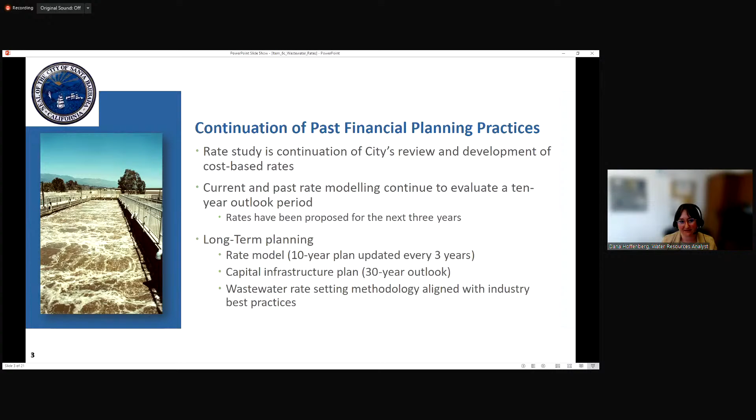So some general goals of the wastewater rate study, in addition to the things I've talked about already. The main goal is, of course, to provide sufficient revenue to operate the wastewater system and maintain the city's wastewater infrastructure. In doing this rate study, we're also making sure we meet the intent of Proposition 218, which requires that we develop rates that are proportional and cost-based. We also want to make sure we are maintaining our prudent financial planning criteria, which includes maintaining our target debt service coverage ratio, essentially making sure we're maintaining our credit rating. We also have to make sure we have enough funds on hand to fund all of our capital projects, and to fund our minimum reserve balances, which are set by City Council. Overall, the rate study is developed using generally accepted methodologies tailored to the city's system and customer characteristics.

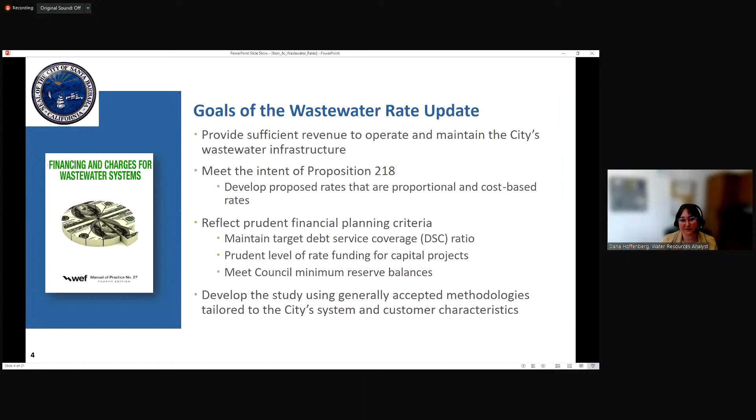Next slide, please. With that, I'm going to go ahead and introduce Shawn Koorn with HDR Engineering, who's going to get a bit more in depth on the wastewater rates.

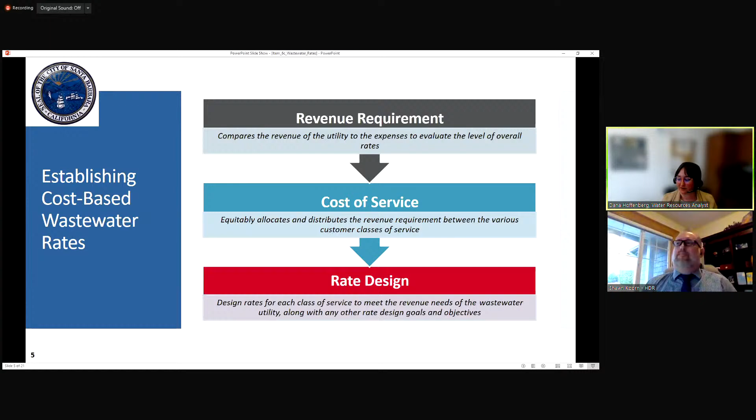Thank you, Ms. Hoffenberg. Good morning, Chair Davis, Commissioners, and Councilmember Sneddon. Shawn Koorn with HDR Engineering, the project manager for the rate study for the city. As Ms. Hoffenberg talked about, we have a lot of goals and objectives that go into this process. Following industry-accepted practices, but tailored to your specific wastewater customers, operations, and development of your wastewater system, we go through a 3-step process. This is the process we talked about during the Rates 101 a couple months ago, and it's also the same process we did in the last water rate study and the prior wastewater rate study. It's really key to go back and meet those goals that were laid out through each of these steps. So that revenue requirement step, which is the step we're going to focus on today, is really a comparison of the existing level of revenues to the proposed costs of the system, both from an operation and capital perspective.

That gives us the first component of the rate study that we want to review, which is what is the overall change in rate revenue that is needed to support the utility. Now that encompasses those goals that Ms. Hoffenberg was talking about, such as protecting the environment, making sure we're meeting all of our operational needs, and providing affordable service to all of the customers. A key element we'll talk about is how we minimize those overall rate revenue impacts based on that capital funding approach, since we have these capital improvement needs to continue to provide service and minimize the impacts to rates.

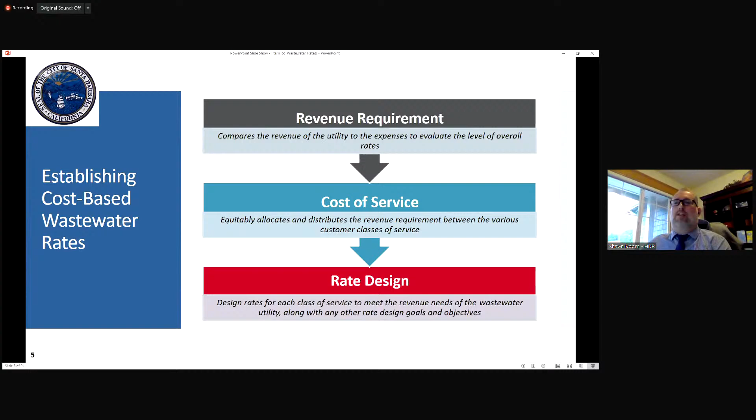So the next slide is our overview of our revenue requirement, the focus of this morning. And really, remember, these are not the rates that the customers are going to see. This is really determining the revenue needs in whole for the wastewater utility to support the operating and capital needs. And as we think about the prior slide, then we go into those next phases to ultimately develop the proposed rates.

The city's not immune to those inflationary impacts, but as Ms. Hoffenberg mentioned, through that long-term planning and the process you have in place, we've been able to minimize some of these impacts going forward. Now, as we think about the capital side, she mentioned a few as well. When we get to the capital plan, you'll notice a couple of major capital improvements, and that's some improvements at the El Estero Water Resource Center, as well as some collection system improvements.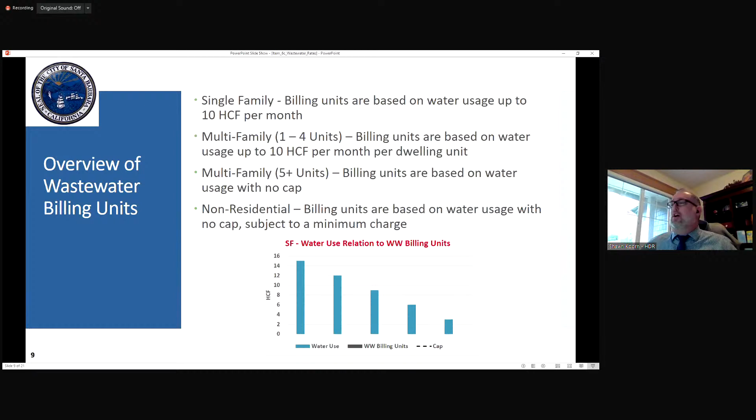Here are some examples of what this residential consumption would look like — someone using 15, someone using 12, someone using 9, 6, and about 3. What you'll see is what we actually bill: that customer on the far left using 15 only gets billed for 10, same with somebody using 12.

Now going forward, what we're seeing is that our customers are getting closer on average to that cap. So 3 to 5 years ago, that average was around 14 HCF. Now we're coming back to where that average is much closer to 10 HCF. So what we may see with future conservation is that those customers aren't going to be billed at the cap.

They're going to be billed at less than the cap, and so the revenues for wastewater will be impacted going forward. Something to consider as we're seeing that usage come down, it becomes a more critical aspect of how we build this into the modeling and how we think of this over a long-term trend and what impact that may have on revenues. We can come back to this conversation if needed. Right now, we built in a 0.2% decrease going forward, but we have looked at what it may be if we have to reduce it more than that.

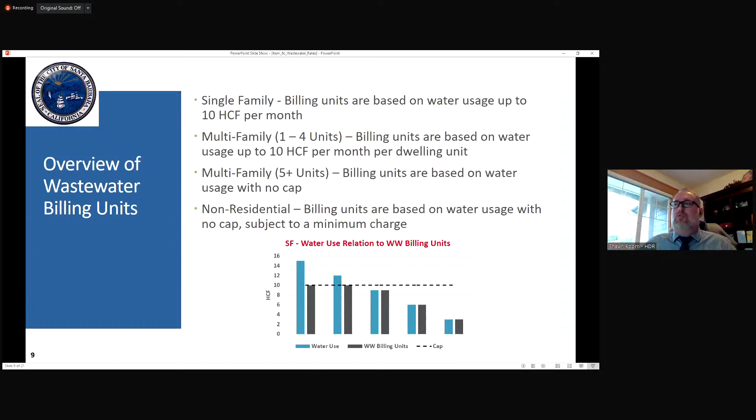So on the next slide we have... and I'm fine stopping for questions, Chair Davis, if we want to stop at that point. I see a hand raised here on my end. It's up to you all. Yeah, it'd be good if you can handle this. Commissioner Kammeyer, go ahead.

Thank you. I was curious about the impacts of conservation on wastewater rates, and I was curious if you've looked at what the statewide urban conservation legislation is pointing to, and whether that's below or above this cap.

I have, and that's a really good question on the second part of that. I have not compared that. That's actually a good thought, something we can all dig into a little, and I can work with staff on that for you all. My gut is telling me that yes, it would start driving that lower with what I have read and seen on those plans going forward.

To your first question, yes, we did run a scenario on reducing residential single family consumption by another 10%, which would get us closer to the possible 15% decrease overall. That would increase the needed revenue adjustments from our 6% annually to the first 2 years being at 8.5%, so about a 2.5% per year increase when you drop consumption by 10%. That was a somewhat global calculation. We know some are still above the cap, but many folks are now starting to trend below the cap as we go forward.

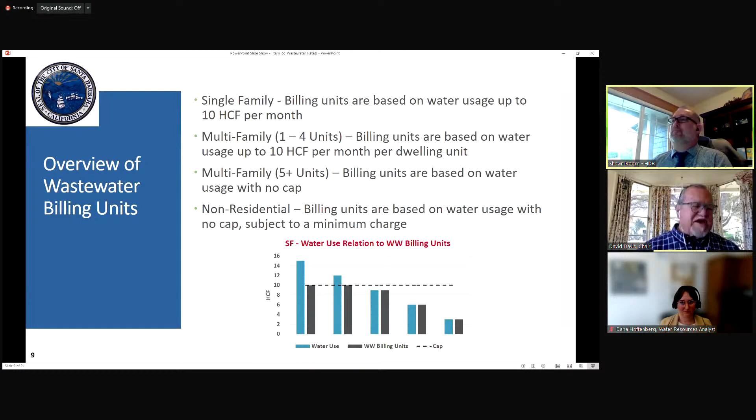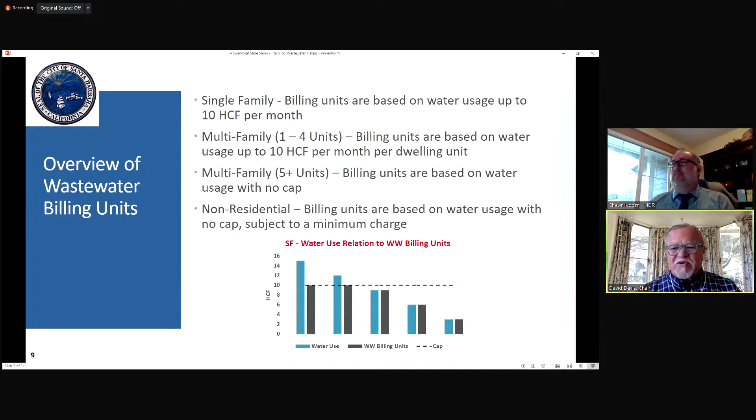No, thank you—actually I do, now that you've shaken the cobwebs, I do remember the presentation. Thank you for the reminder and the simple explanation. Other questions at this point, or can we go on? Not seeing any other questions. We can continue. All right, thank you.

So this next slide puts together the overall capital funding analysis. As we talked about at the beginning, the revenue requirement has two key parts. There's our operation and maintenance expense, which covers all materials, supplies, and staffing needed to maintain and operate the system—very similar to what you heard this morning on the water side. We have those same folks on the wastewater side doing all the wastewater activities.

The other big piece is our capital funding analysis. As we go through this process, we take the current capital plan and look at how that's being funded over this time frame. Remember, our focus is only on the next three years, fiscal year 23, 24, and 25, but we wanted to bring a couple key points to you as we think through the process.

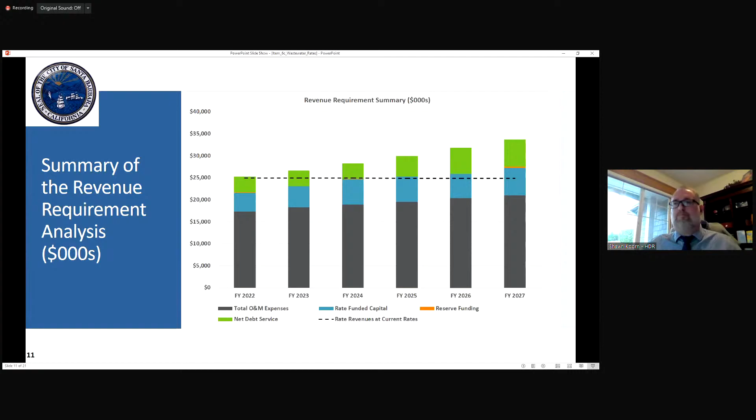On the next slide, I have a bit more of a summary of what those drivers are. We are looking at those rate adjustments to fund our annual inflationary impacts and staffing adjustments as we go out over this next 3 and 10-year period, focusing on the 3 years for rate setting. Making sure we have sufficient capital funding for our renewal and replacement—that's the rate funded capital line we looked at—as well as other necessary improvements, the big ones being the electrical project at El Estero and the Braemar lift station, which in the short term are debt financed through low interest loans.

Maintaining our reserve policies—you saw a little sliver in each of those bars on the prior slide showing what we're putting into reserves. And as I mentioned at the beginning, as we're looking at issuing debt, we have to maintain adequate financial metrics—our debt service coverage ratios, our reserves, ensuring that the utility can pay that back over time.

Now, to sum that up—and again, this is not the rate design, this is the average increase that customers may see—is somewhere between $3.50 to $4.50 per month each year over the 3-year rate setting period. As we complete the cost of service analysis, if there are differences in how we need to collect that revenue from customers based on how they use the system, then that number can change slightly between the different rate schedules: single family, multifamily, and non-residential.

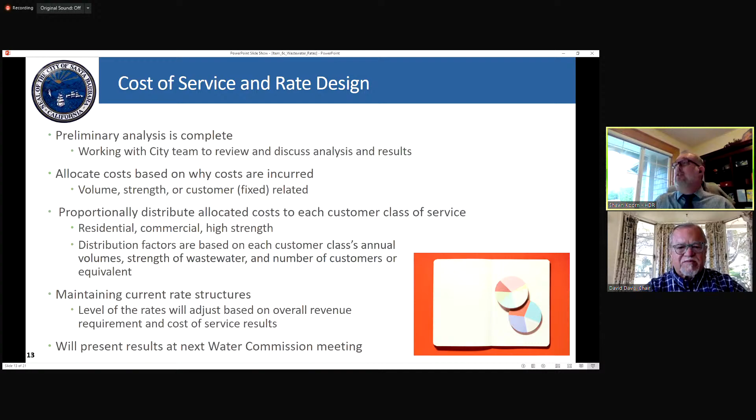So what we'll be back with you on February 17th is the final numbers for the revenue requirement. I don't see any changes at this point, but any comments are welcome here as part of this. And then the recommendations from the cost of service and proposed rates, what that's looking like going forward.

And Chair Davis. Great, thank you, Shawn. Before I go to Commissioner Kammeyer, I just want to thank you again for bringing this back to us, you and staff, as a progression, to build the study in our own minds. I think it's been quite helpful. Commissioner Kammeyer, go ahead, Cora.

Thank you, yeah, just agreed. It's been really helpful to get a couple different touch points on this, and I look forward to the final presentation next month. I'm still getting a little bit stuck on the impacts of conservation and the assumptions around water use going into that. I realize we're already over time, so I don't know if we want to get back into that discussion now, or perhaps set up another time to talk, but I would like to dig into that a little bit more.

I'm okay continuing for a few more minutes. Again, no one has indicated we're going to run over, probably 15, 20 minutes today. Commissioner Cooney? Yeah, I actually cannot stay any longer, I apologize, I just have a hard stop right now. Okay, that's great, we still have a quorum, we can continue. We'll see you next month. Thanks for your work today. Thank you so much, have a great month, guys.

You're welcome. Commissioner Kammeyer, back to your question. Yeah, so I was just wanting to clarify on that 10 HCF cap, and you said something about how this is only for, I guess, non-consumptive uses, basically indoor uses that go back into the wastewater system, is that correct? That is the target of how we come back to that 10 HCF cap, thinking about what is that typical indoor use for an average single family home that they would use inside. That's essentially the basis for that winter use to set that cap.

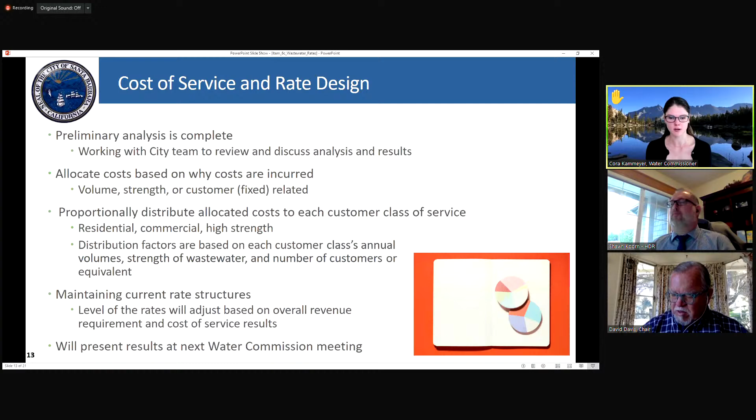And I was just wondering, when you said the impact that the potential incorporation of conservation would have on the rates, it was pretty significant, a couple percentage points. So given all of the efforts the city has put into encouraging conservation, it seems like we should be operating under the assumption that conservation is going to happen or is very likely to happen, and that should be strongly considered in this rate setting. The 10 HCF just seems high to me.

Yeah, that's a great comment, and I think that's why we brought that slide into this. When we were going through the presentation, we felt like that's an important concept and driver, as we talked about, and what that impact can be. And so that's something we can adjust.

One thing to think about as we go through the rate setting process is that under Proposition 218, we're setting the maximum rate. So if council adopts this, as we're going to recommend, after we go through the whole process, that is the rate that has to be in place, or the maximum rate in each of these 3 years. Now, the council can always be below that, right? If conservation doesn't occur at the levels we think it is and impacts to wastewater revenues. But if you had to go higher, then we would have to go back through a Proposition 218 process.

So there's this balance that we need to try and make as we go through this, of what we expect to occur, what we're planning, and we'll figure out what reality is as we go forward through the process. But that's a great comment, and I think that's something we can kick around, my team and the city team, on how we want to take that into consideration going forward.

That would be great, thank you. And yeah, I definitely don't pretend to understand all of the factors that go into this, and I'm sure that you're considering them all, but that just kind of raised the flag for me, so I appreciate you looking into it. Great, thank you. Other questions at this point from the commission?

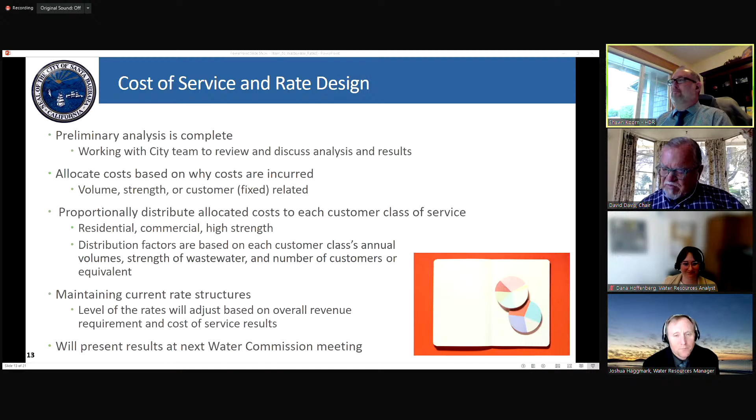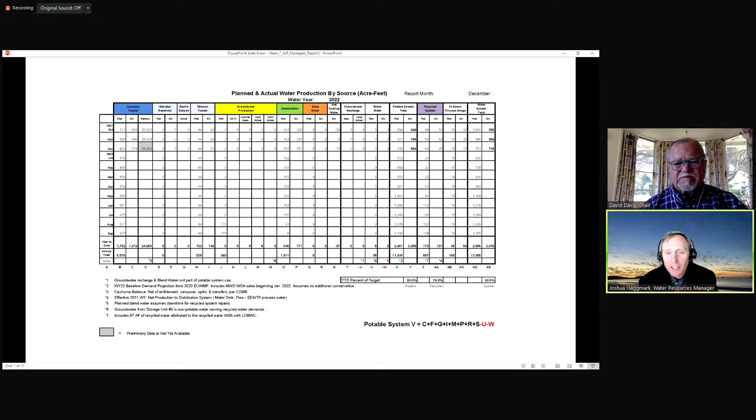I'm just going to make this brief. First of all, we just finished our 6 months of our fiscal year, and I'm happy to report that both water and wastewater rates are coming in right on target. So really pleased there.

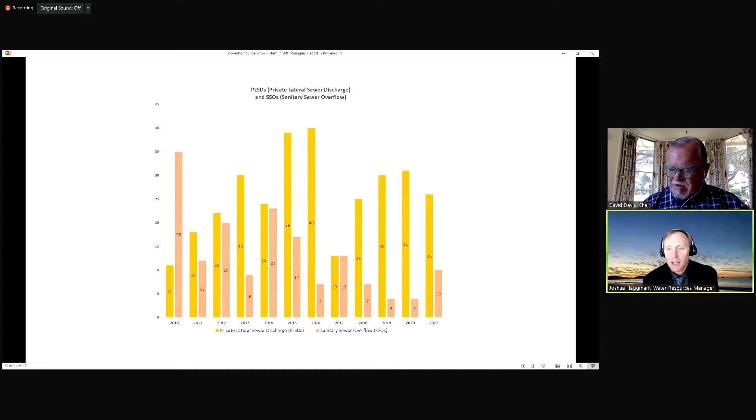And then slide 11, Ms. Becerra, I just want to point out we ended the calendar year with 10 spills. We're now monitoring our spills, and you can see we had 26 private lateral spills. So not the direction I like to see our public spills going. I think it reflects the challenging year we really had in the collections group with the pandemic, and honestly trying to find sufficient staff to keep up with maintenance. So more to come on that.

So they're eager to find out when the pandemic will peak in the community because of their own staffing issues. So we are discussing that with them. They are looking for additional grant funding to help sponsor more monitoring than once a week. So this data seems to be helpful in the community now. So we're trying to figure out how to help everybody get the information they need. And with that, I'm happy to answer any questions.